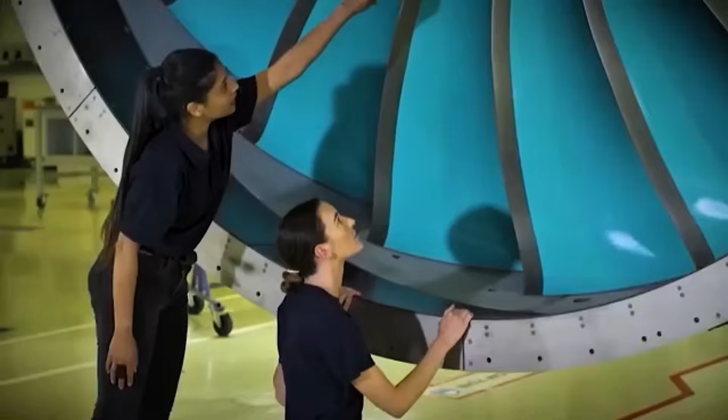In March of 2020, every major airline on Earth grounded its fleet almost overnight. And somewhere in Derby, England, a company that doesn't fly a single passenger, doesn't own a single airport, and doesn't sell tickets to anyone, watched its revenue collapse faster than the airlines themselves.

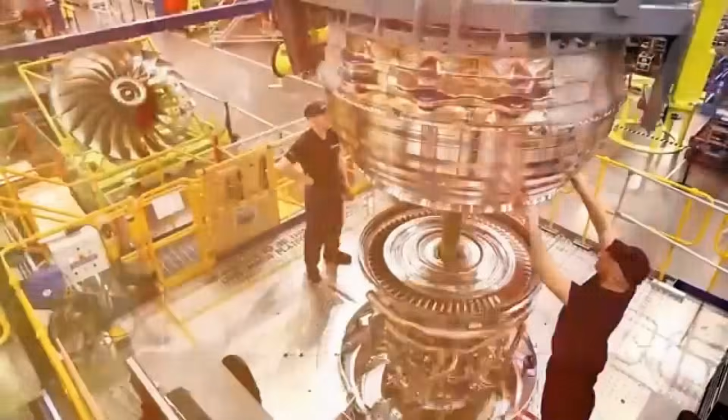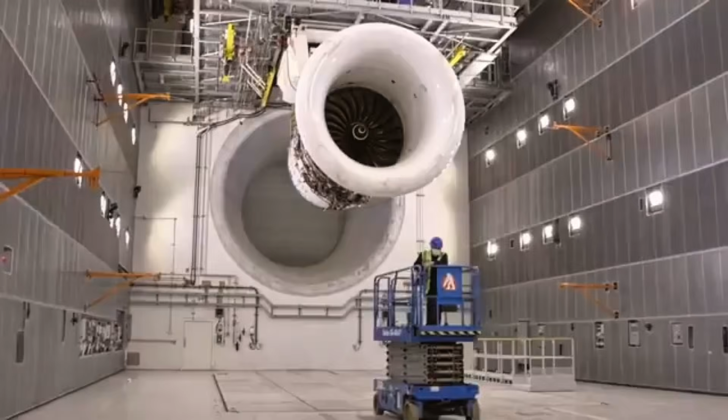Rolls-Royce raised £2 billion in an emergency rescue offering. It cut 9,000 jobs. Its share price fell more than 80%. Here's the strange part. Nobody had canceled a single engine order. The engines Rolls-Royce had already built and delivered were sitting exactly where they'd always been, bolted under the wings of Airbus A350s parked in the desert.

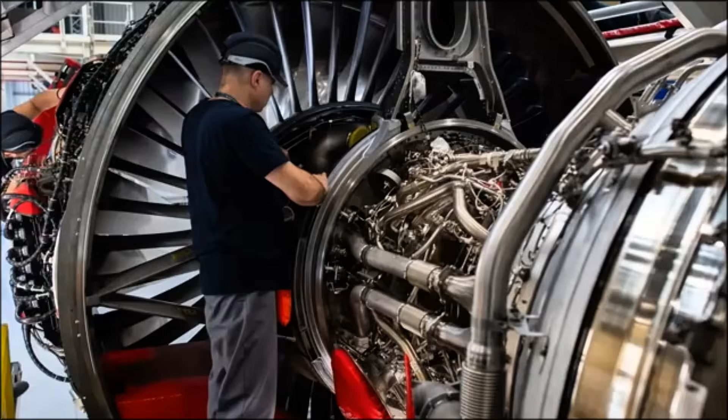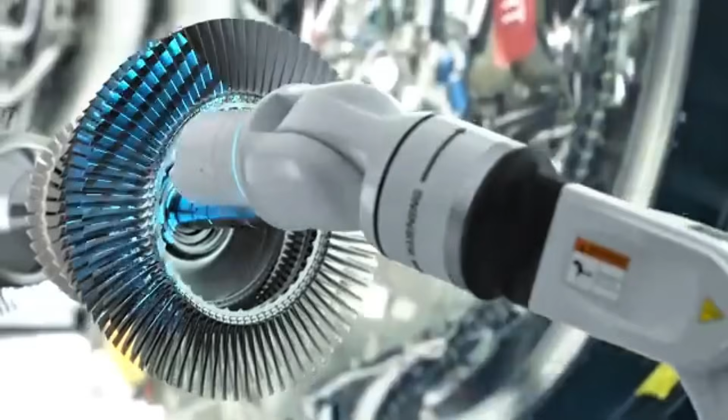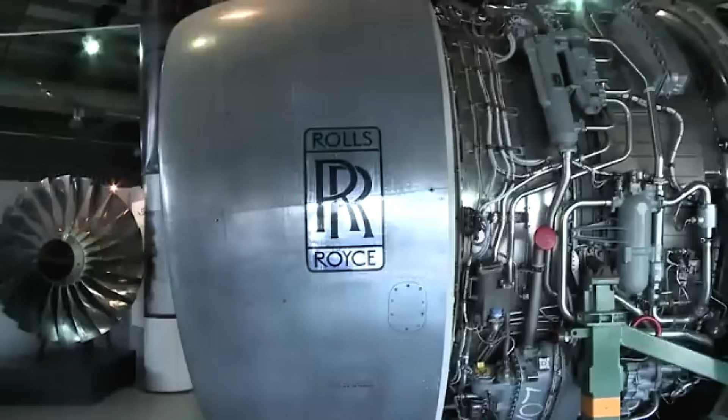They just weren't moving. In Rolls-Royce's business, an engine that isn't flying is an engine that isn't earning a single pound. To understand why, you have to understand something most people get completely wrong about how jet engines actually get sold. When a normal company sells something expensive and complicated, a car, a piece of industrial machinery, they sell it once. The buyer takes ownership, and from that point forward, the buyer also takes the risk. The maintenance costs, the breakdowns, all of it belongs to whoever bought the thing.

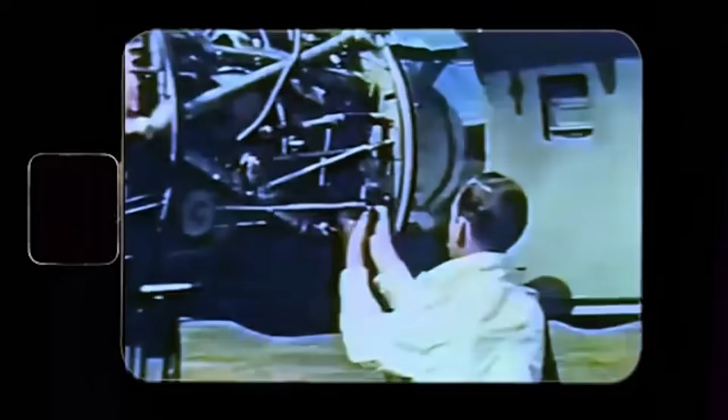Rolls-Royce looked at that arrangement roughly 60 years ago and decided it didn't want any part of it, at least not for jet engines. Rolls-Royce, the third largest maker of commercial aircraft engines in the world, doesn't really sell jet engines in the traditional sense. It rents them out by the hour.

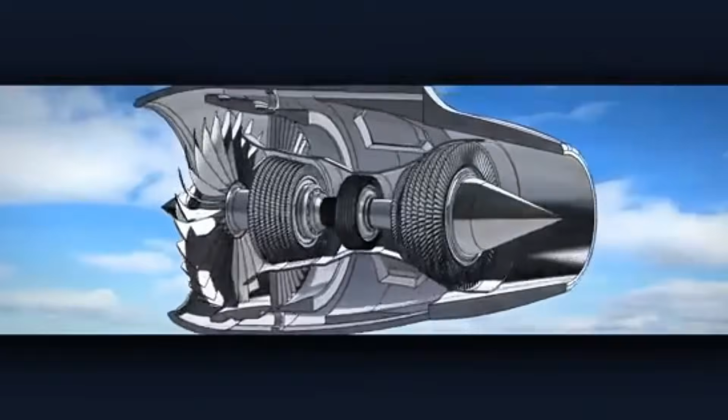When an airline buys an Airbus A350, the two enormous engines hanging underneath the wings are technically the airline's legal property. But for the next 25 to 30 years, almost everything that actually matters about those engines, the maintenance, the performance risk, the cost of every single shop visit, stays with Rolls-Royce, in exchange for a fixed fee paid for every hour those engines spend in the air.

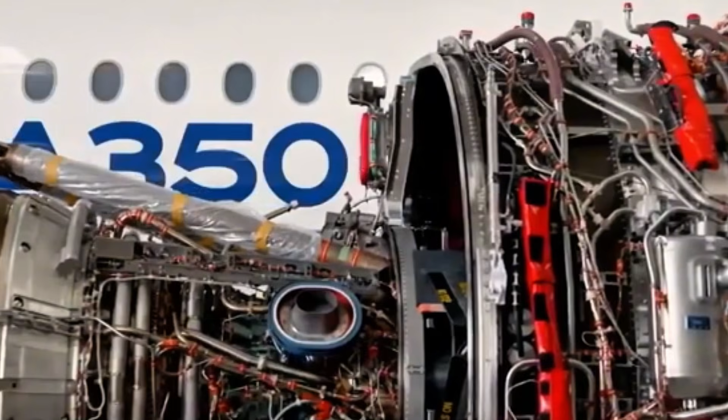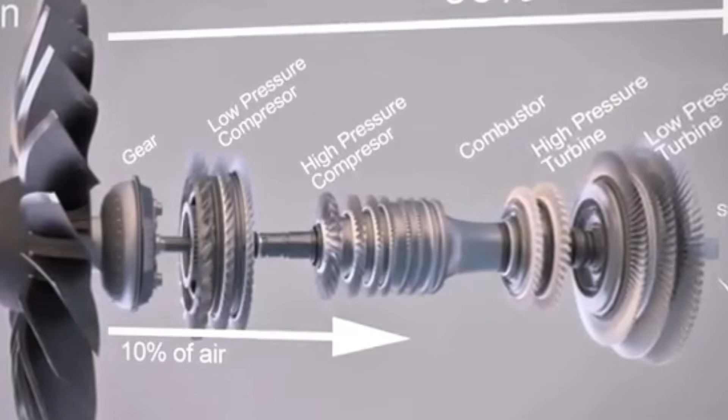It's one of the strangest financial arrangements in modern manufacturing. A Rolls-Royce engine isn't really a product an airline owns outright. It's closer to a 25-year subscription where the airline supplies the airframe and Rolls-Royce keeps the metal alive underneath it. To understand why this model exists and why it very nearly destroyed the company in 2020, you actually have to start with the engineering itself.

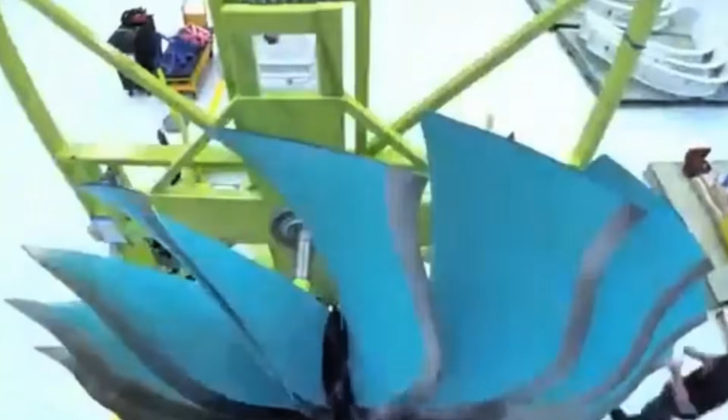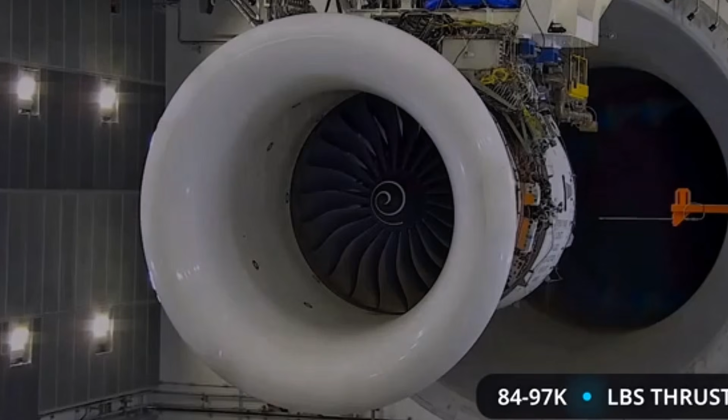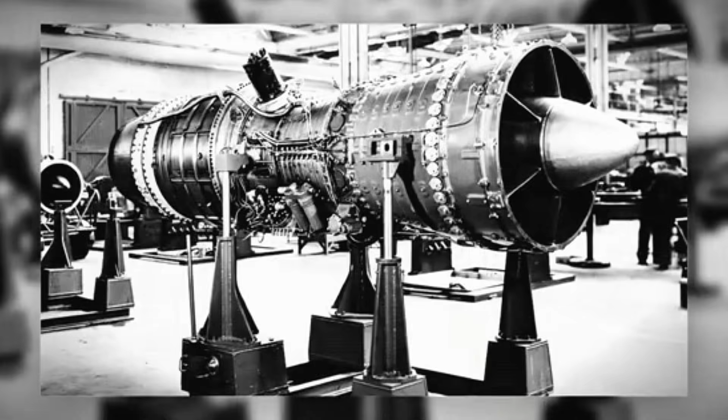The Trent family of engines powering the A350, 787, A380, and most modern wide-body jets is built around a design most engineers would call unnecessarily complicated, a three-shaft architecture. A typical jet engine, the kind GE or Pratt and Whitney build, has two concentric spinning shafts, low pressure connecting the fan to the rear turbine, high pressure connecting the compressor to the front turbine.

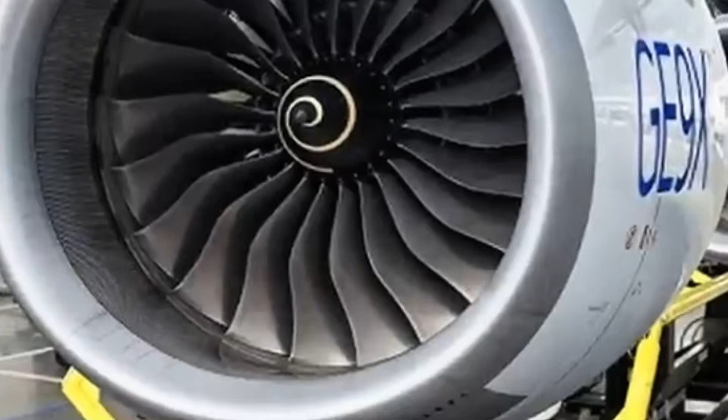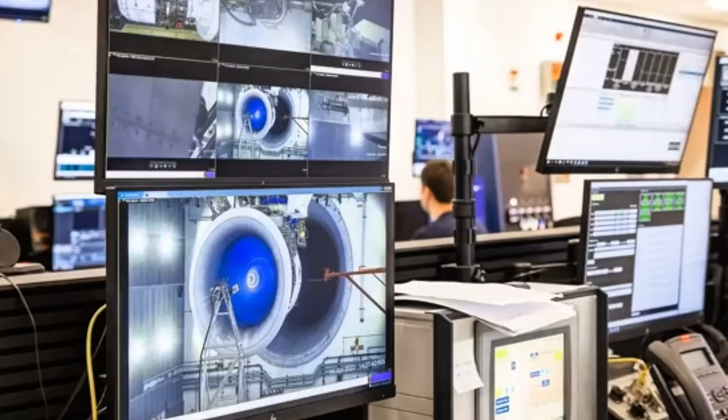A Trent has three, with the fan, intermediate compressor, and high pressure compressor each spinning independently at their own optimal speed. It's more efficient since every component runs exactly where it performs best. It's also far more complex to build and maintain. Intuitively, more shafts should mean more failure points and more cost. It does. But Rolls-Royce turned that complexity into a structural advantage none of its competitors could easily copy.

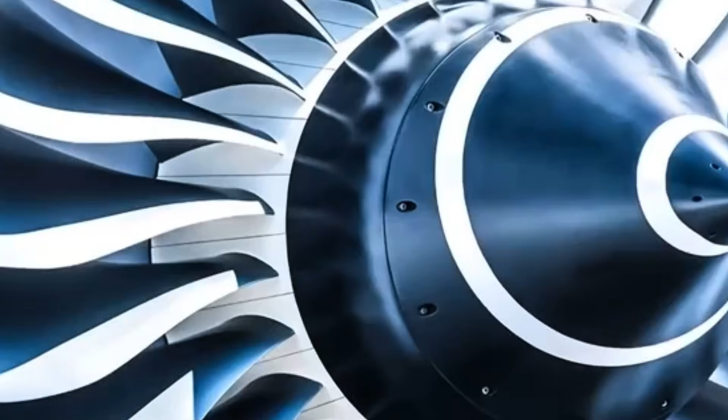The Trent XWB, which powers the A350, has a fan roughly 3 meters across with 22 titanium blades, producing between 84,000 and 97,000 pounds of thrust. And Rolls-Royce calls it the most fuel-efficient large aero engine in commercial service, burning 25% less fuel than what it replaced. That detail matters enormously to everything that follows.

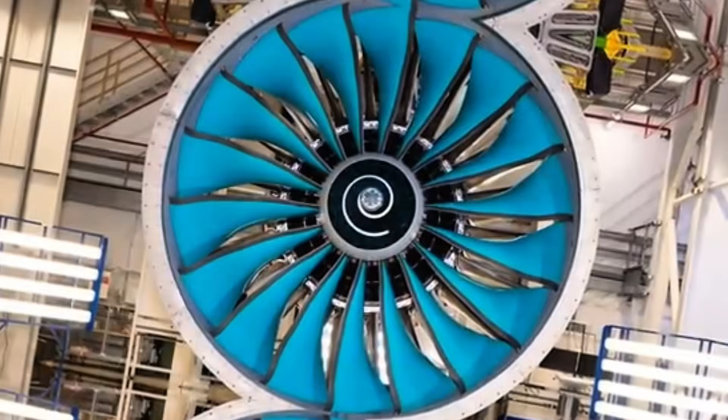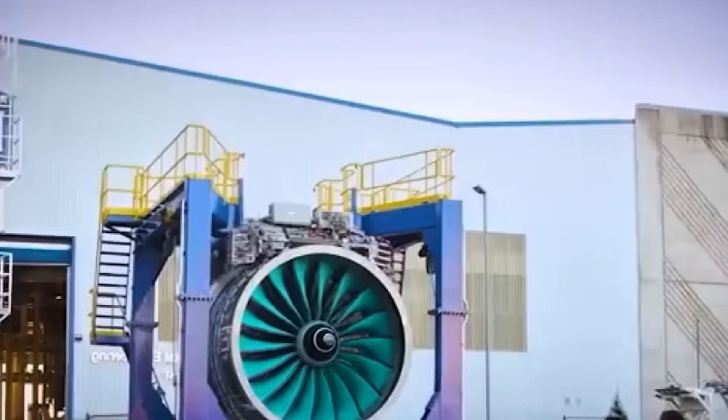Back in 1962, a British engine maker called Bristol Siddeley had a problem. Its Viper turbojet, originally a cheap, disposable engine for target drones, kept needing unexpected maintenance once repurposed for actual business jets. So Bristol Siddeley invented a contract that had never really existed in aviation before, telling operators of the de Havilland 125 something radical. Don't pay us when the engine breaks. Pay a fixed amount for every hour it flies and we'll handle everything else. They called it power by the hour.

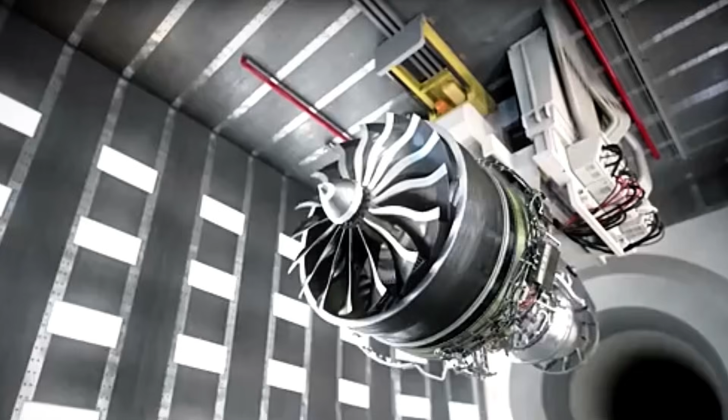When Rolls-Royce acquired Bristol Siddeley in 1966, it inherited that structure, and over the following 4 decades, industrialized it, rebuilding its entire commercial aerospace business around it. The terms are simple once you understand them. The airline pays a fixed dollar amount per engine per flying hour. In return, Rolls-Royce takes on full responsibility for performance, scheduled maintenance, unscheduled repairs, replacement parts, and every shop visit for the engine's entire operational life.

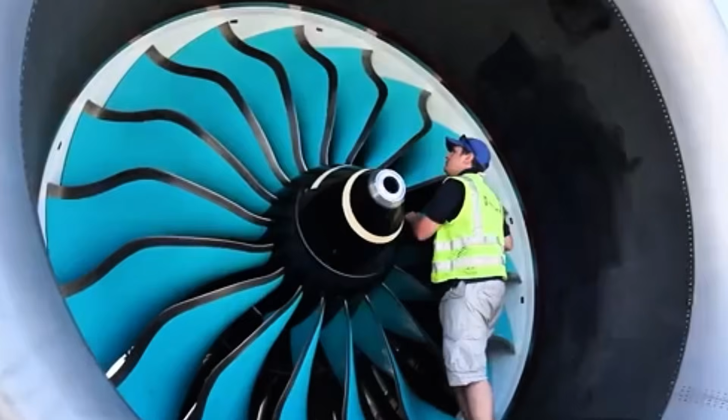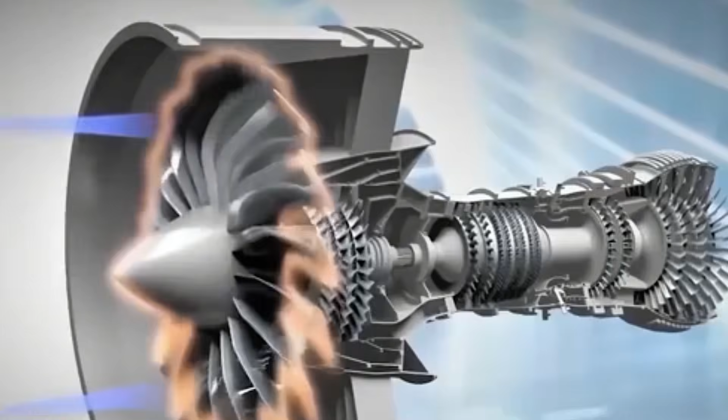The airline gets a predictable cost of ownership. Rolls-Royce gets a 25-year revenue stream tied to one variable: how often those planes are actually in the air. What makes this model possible and also makes it so dangerous is buried in the engineering itself. Modern jet engines operate at temperatures that should, by any normal material standard, be impossible to survive.

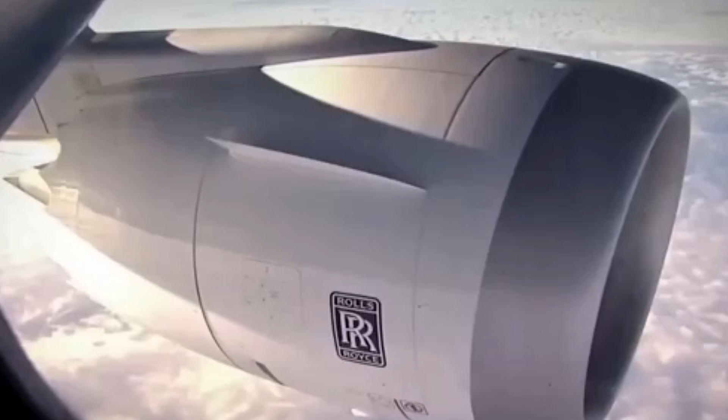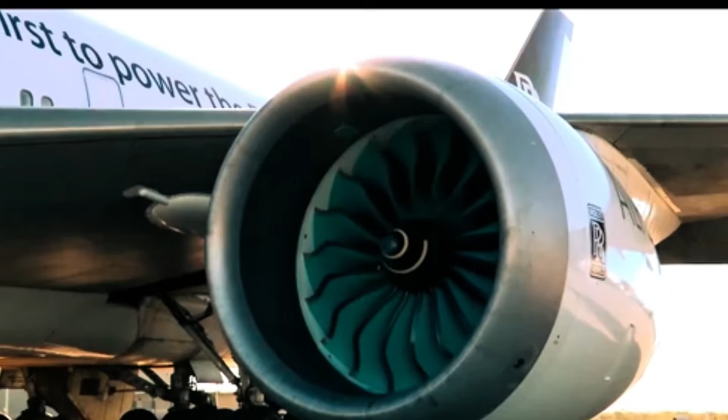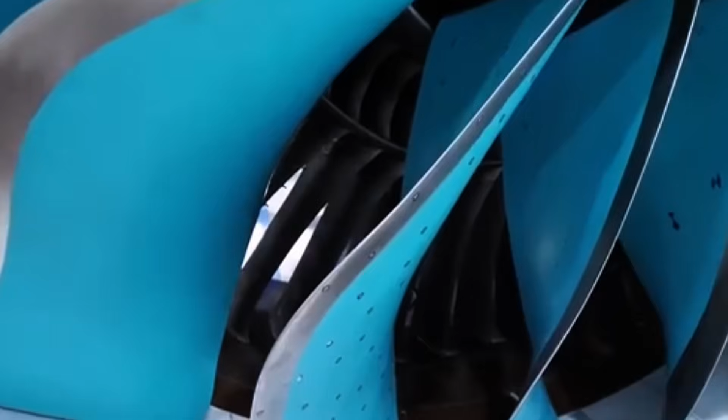The turbine inlet temperature inside a Trent, where burning fuel meets the first turbine stage, runs between 1,500 and 1,700 degrees Celsius, hundreds of degrees hotter than the melting point of the nickel superalloy the blades are made from. Those blades survive only because they're hollow. Cooling air bleeds from the compressor and forces through internal channels, escaping through tiny pinholes on the blade surface, creating a thin film of cooler air that keeps the metal from melting. Every blade is also coated in a ceramic thermal barrier layer, roughly as thick as a sheet of paper, which does most of the actual heat shielding.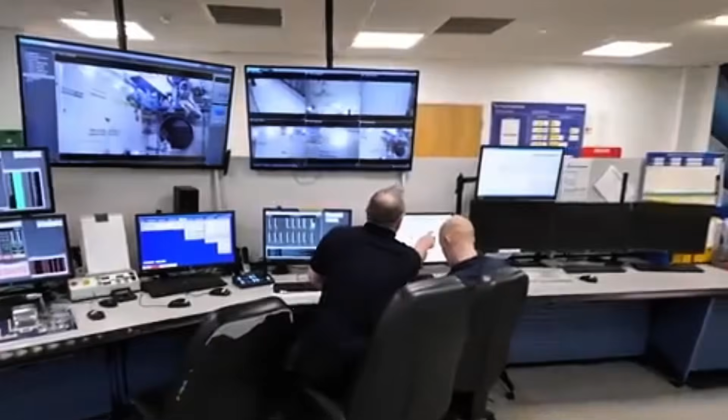This level of materials engineering isn't something you can maintain casually or outsource cheaply to a third-party shop. The tooling is entirely bespoke to Rolls-Royce. The training takes years, and the supply chain for genuine replacement parts runs directly through Rolls-Royce alone.

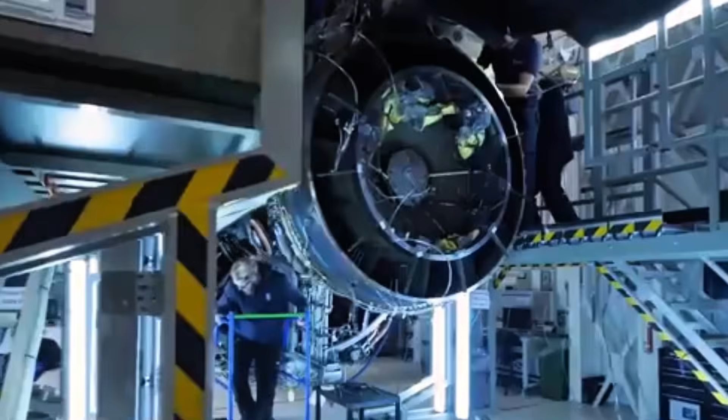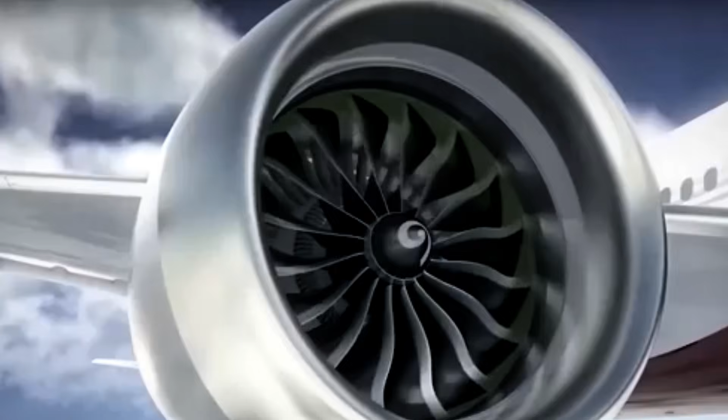On top of that sits the data layer. Every Trent engine currently in flight transmits real-time performance data by satellite back to Rolls-Royce's operations center in Derby, England, where roughly 170 engineers monitor thousands of engines simultaneously, watching for early warning signs before a small problem becomes an expensive one. This engineering monopoly is exactly what lets Rolls-Royce dominate the hidden majority of its entire business, the aftermarket.

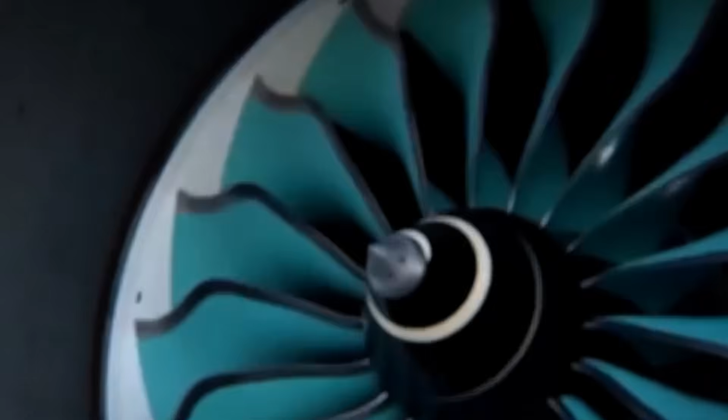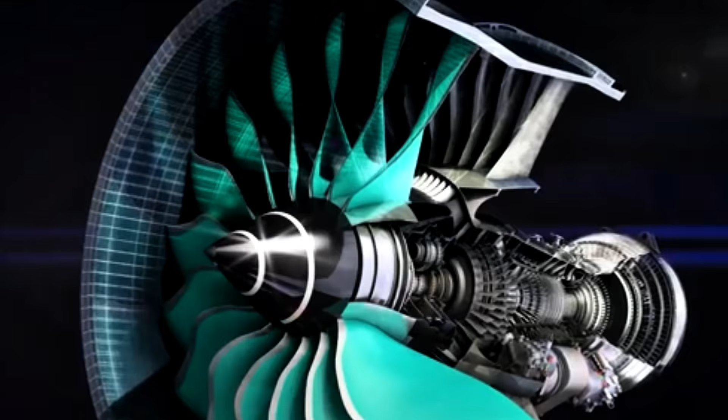In 2023, its civil aerospace division generated around £4.6 billion in aftermarket revenue alone, roughly 72% of it from long-term service agreements like this one. The initial engine sale happens once. The maintenance contract that follows runs for 25 to 30 years, and across that lifespan, ongoing service revenue completely dwarfs the original hardware sale. The aftermarket isn't a side business, it is the business. Selling the engine is just the entry ticket.

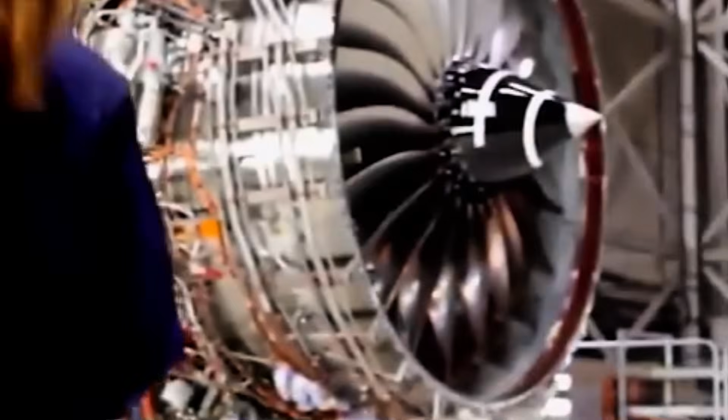The Trent fleet today is overwhelmingly locked into this structure. Roughly 90% of installed Trent engines are covered under one of these long-term care agreements, and effectively, 100% of existing customers re-enroll for their next aircraft order. As of early 2024, Rolls-Royce had 248 active long-term service contracts covering roughly 4,000 large commercial engines, a quarter-century of guaranteed revenue indexed to one number: total flight hours flown.

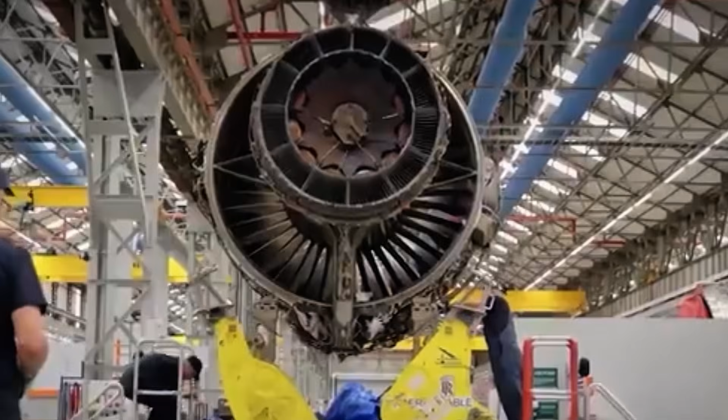The entire model only really breaks down if airlines simply stop flying. Until 2020, that was purely a theoretical risk. It had never actually happened at global scale before. Here's where the story gets strange even before the pandemic hit.

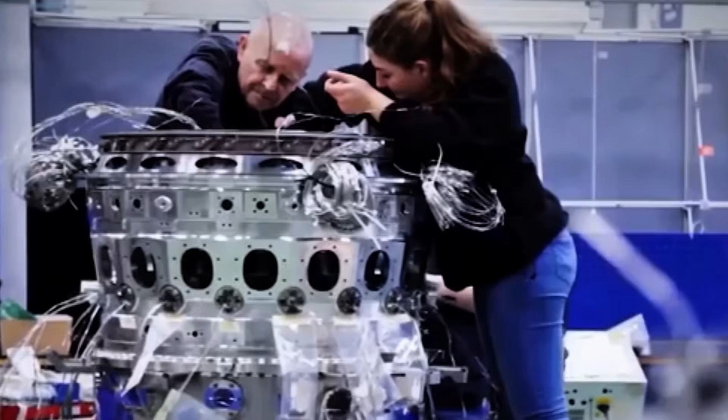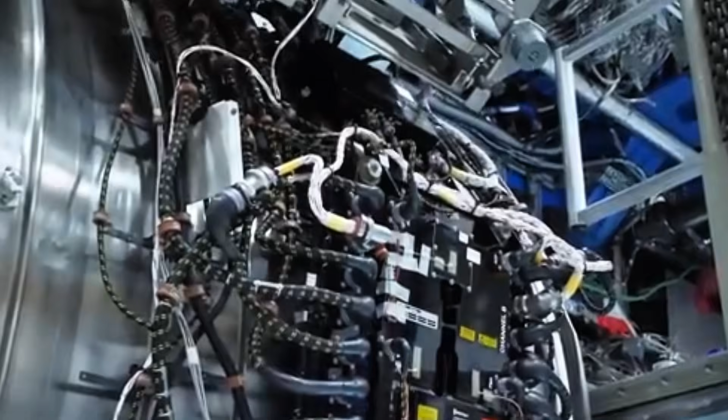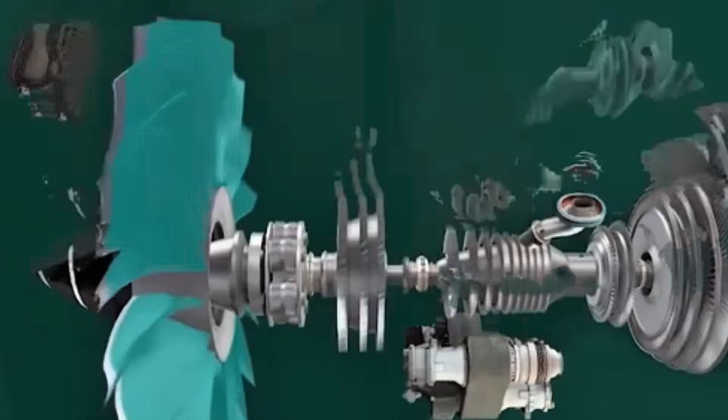Back in 2016, on brand new 787 Dreamliners operated by All Nippon Airways, Rolls-Royce engineers found the intermediate pressure turbine blades inside the Trent 1000, a different Trent variant built for the Dreamliner, corroding faster than anyone expected. Up to 500 engines were affected. At the worst point in 2019, 44 wide-body aircraft sat parked on tarmacs waiting for replacement blades, and the FAA cut the 787's certified over-water range from 330 minutes to just 140, gutting one of the aircraft's central selling points overnight.

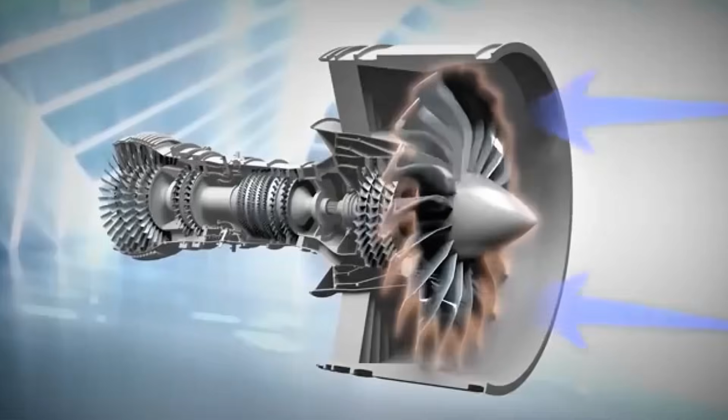Under the power-by-the-hour structure, every grounded Trent 1000 was entirely Rolls-Royce's problem to fix and its bill to pay. Between 2017 and 2023, the company absorbed £2.4 billion in charges tied to fixing that durability problem alone.

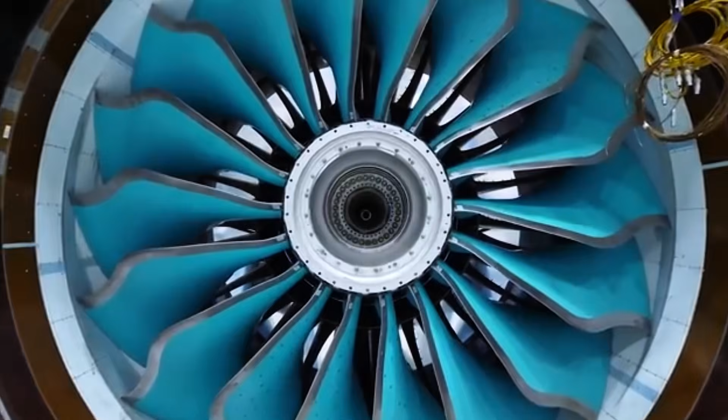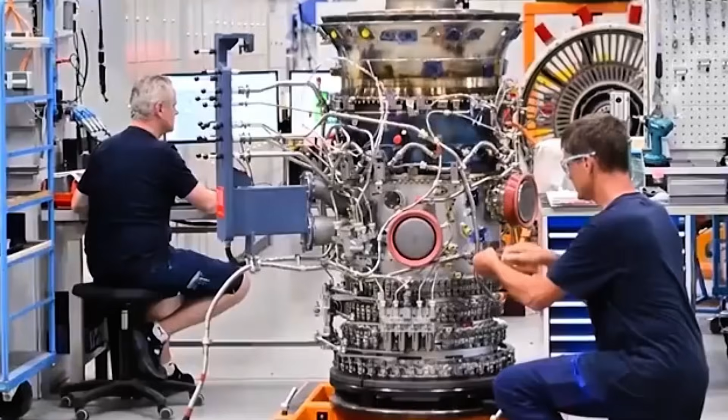Then, in March of 2020, the entire global commercial aviation industry stopped moving almost simultaneously. Wide-body flight hours, the exact metric Rolls-Royce's entire revenue model was built around, fell by roughly 3/4 within a matter of weeks. Every long-term care contract the company had ever signed technically remained in force. None of them were generating any actual payment. The exact model that had spent 60 years transferring maintenance risk away from airlines and onto Rolls-Royce was now, for the first time, transferring an unprecedented industry-wide crisis directly onto Rolls-Royce's own balance sheet.

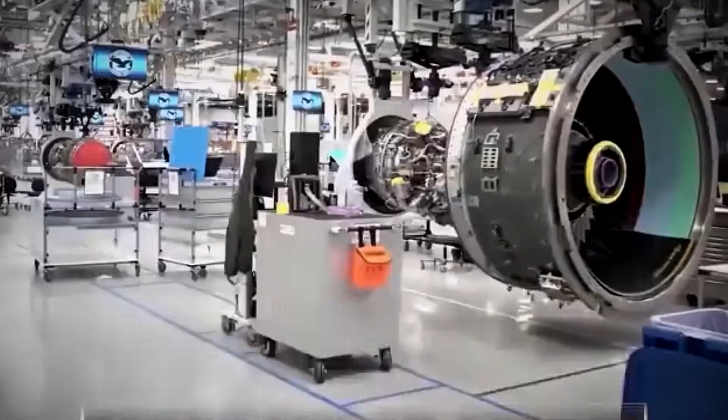In October of 2020, the company raised £2 billion through an emergency rights issue, added a £1 billion bond and a £1 billion bank loan, bringing total emergency liquidity to roughly £5 billion. It announced 9,000 job cuts. Its share price collapsed from over 700 pence in early 2020 to below 100 pence by that autumn.

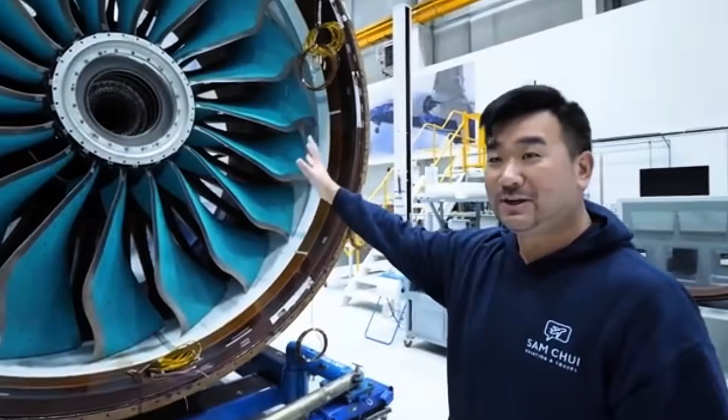Then something almost nobody predicted happened. Those long-term care contracts hadn't actually disappeared when the fleets got grounded. They'd simply paused. Every A350 and 787 sitting motionless in desert storage in 2020 represented a deferred Rolls-Royce invoice, not a canceled one. When flight hours eventually came back, they came back against contracts already signed years earlier, on fleets Rolls-Royce had spent decades locking in.

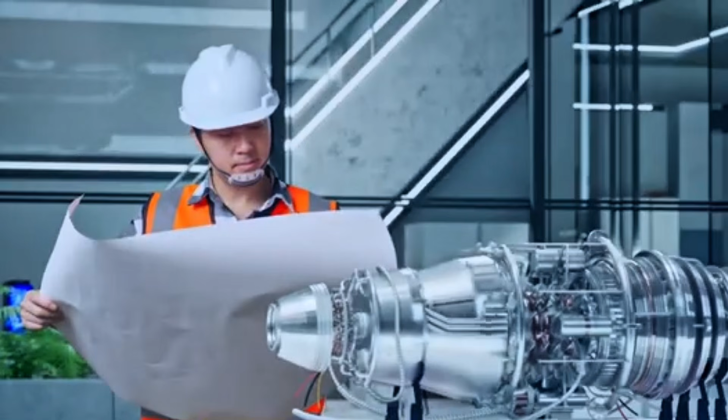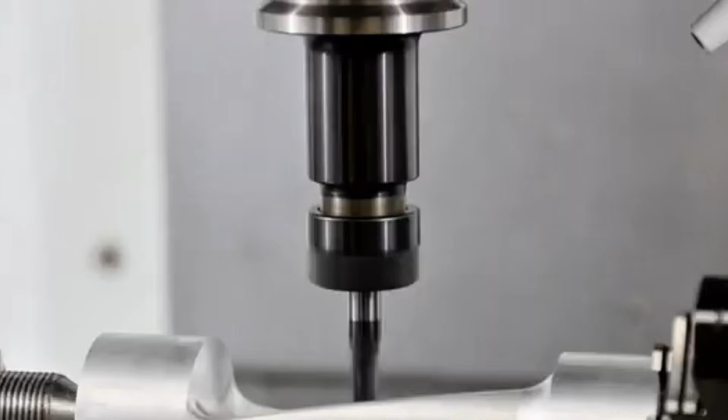By 2024, the company reported an underlying operating profit of £2.5 billion. In 2025, that grew to £3.5 billion, with civil aerospace margins reaching 20%. The share price climbed past £11 by mid-2025, a roughly tenfold recovery from its pandemic low, and the company started buying back £1 billion of its own stock. Same underlying model, simply different flight hours running through it.

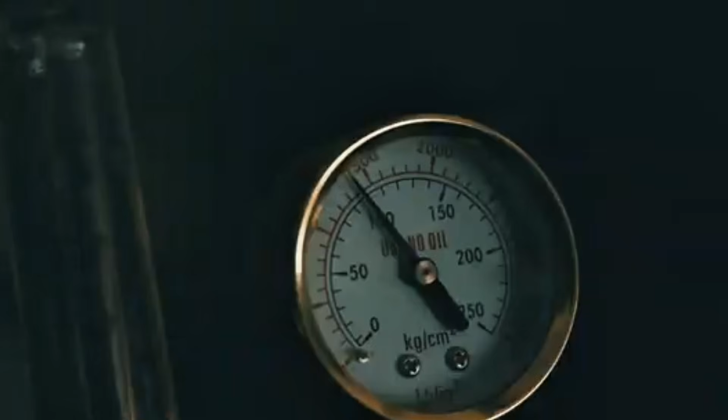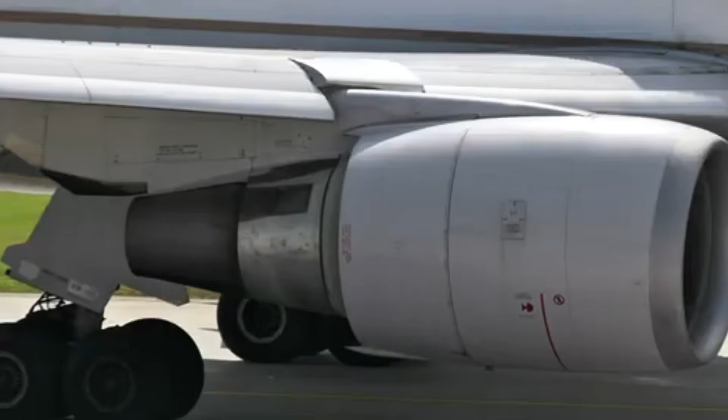So the real story of Rolls-Royce was never really about building jet engines. It's about figuring out, decades before anyone else in the industry caught on, that the engine itself was never the product. The flight hour was the product all along. 60 years ago, Bristol Siddeley solved a maintenance headache on a modest business jet by inverting the contract. Charge per flying hour instead of per part, absorb the risk, keep the relationship for decades instead of one transaction.

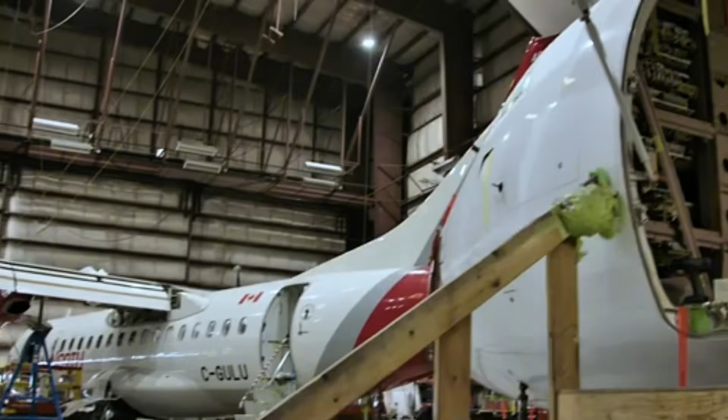Rolls-Royce inherited that idea almost by accident, scaled it across the most complex turbine engineering ever built, and constructed a business where its own interests and its airline customers' interests are almost perfectly aligned. Both sides win as long as the engines keep flying. The catch? The part almost nobody fully appreciated until it actually happened is what occurs when the engines stop flying entirely. The pandemic answered that question with brutal clarity in 2020. The recovery answered it again, just as clearly, by 2025.

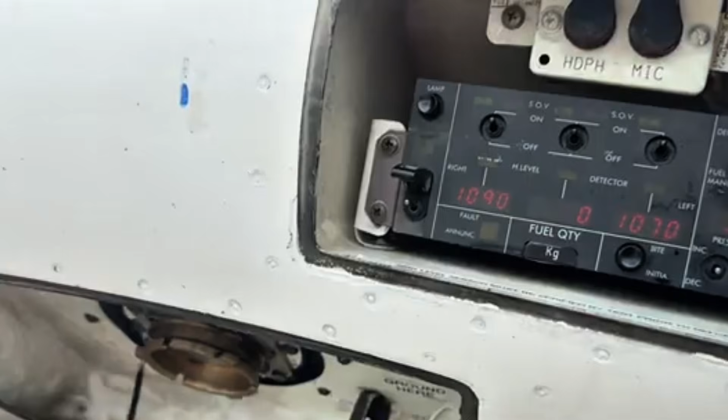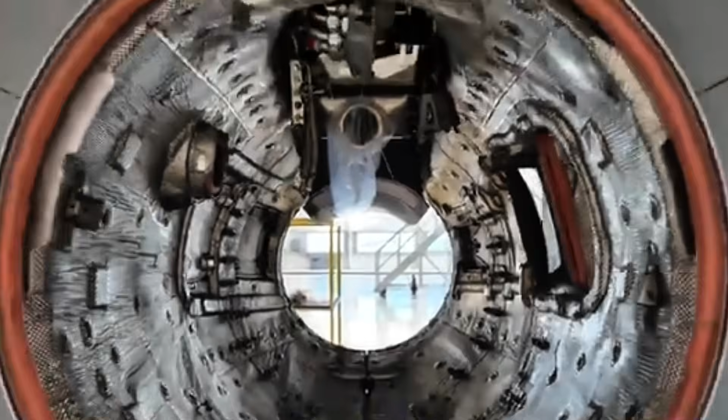The next time you're boarding an A350 and glance out at the engine under the wing, remember what's actually happening underneath that casing. The airline technically owns the turbine, but Rolls-Royce, very quietly, owns the next quarter century of every revolution that engine makes.